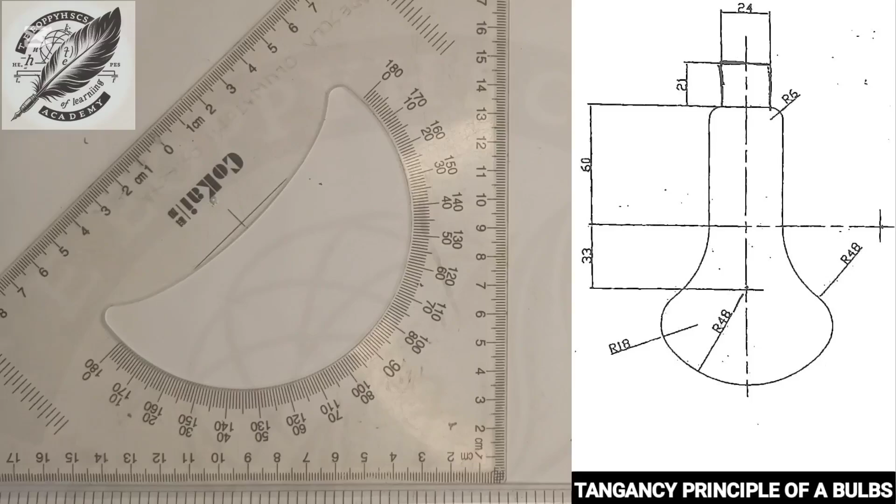Principle of tangency. Today I have a wonderful question, which is tangency on the bulb. So you can see the dimension and diagram showing on my screen.

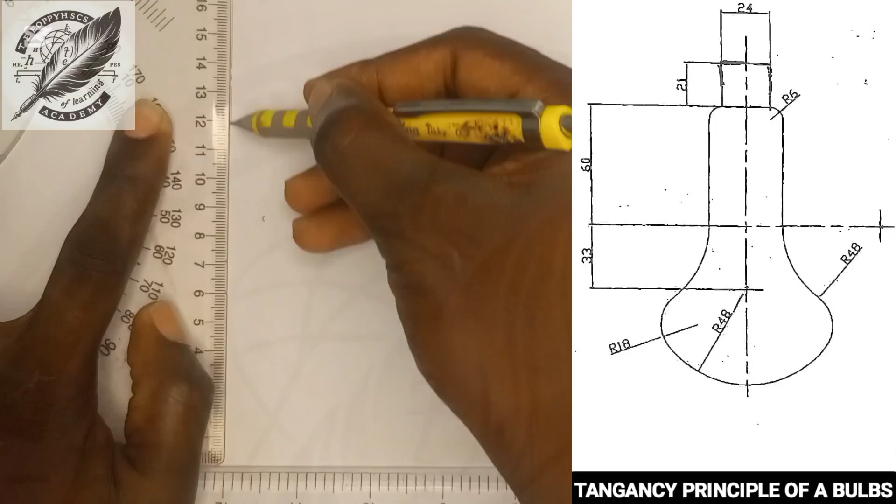First thing you need to do is take your ruler, your T-square, place it on your ruler, and draw a middle line from here. Just draw a center line. So I will start drawing my center line: long dash, long dash, long dash, long dash, long. Can you see it here?

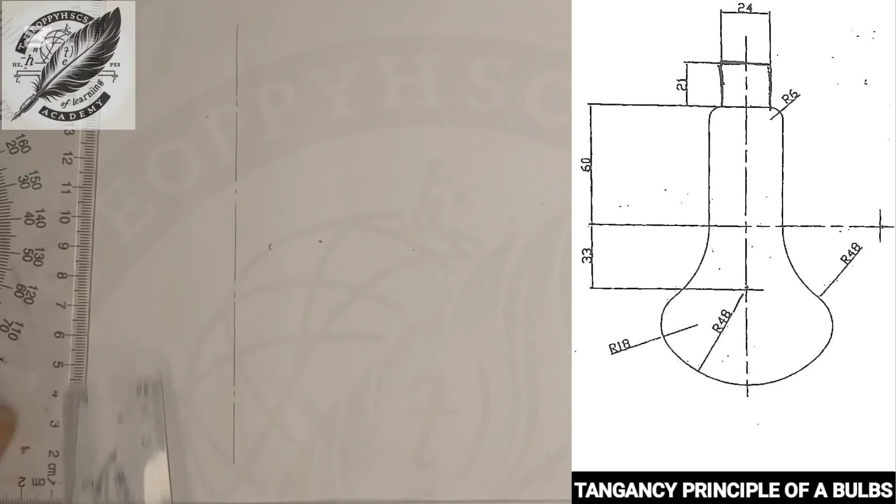The next step is to take a measurement, which they give you. Let me mark a starting point here and an ending point here. You can see they give us from here to here: 60 millimeters. So I'll use 6 centimeters.

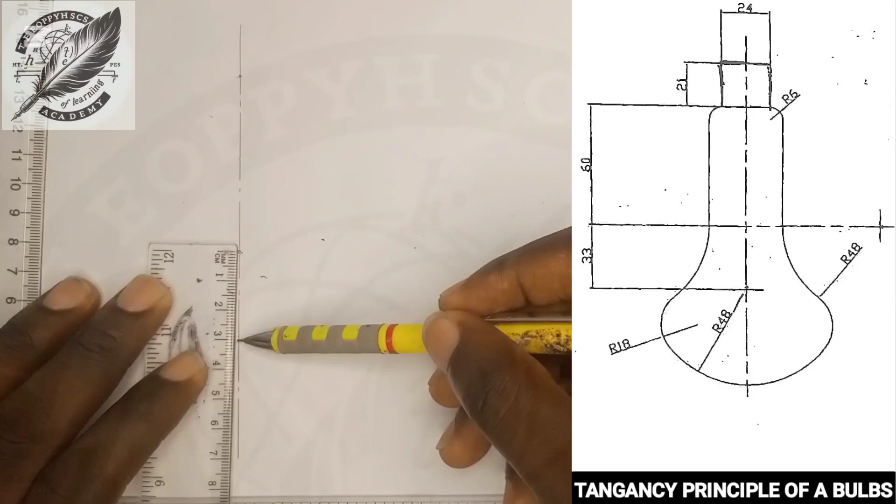I'll mark this space, I'll cut off this space, and I will come to this place. I'll use 33 millimeters, so I'll use 3.3 centimeters. I'll mark this place.

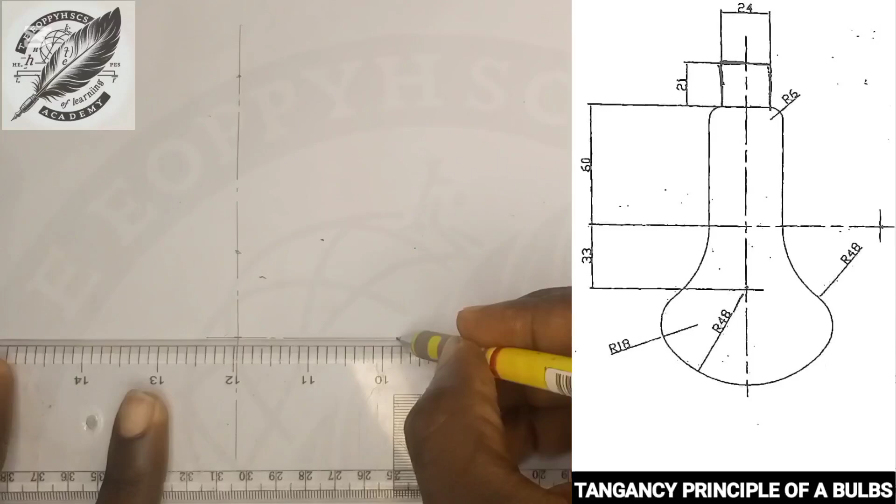After I've marked that, what will I do? I'll take my T-square, place it on top of this point here, shift it here, and draw a center line: long dash, long, and a bit long dash, long dash. This is the first thing you need to do to draw it correctly. This center line means your center of the circle, where you mark your circle, where you start copying your circle.

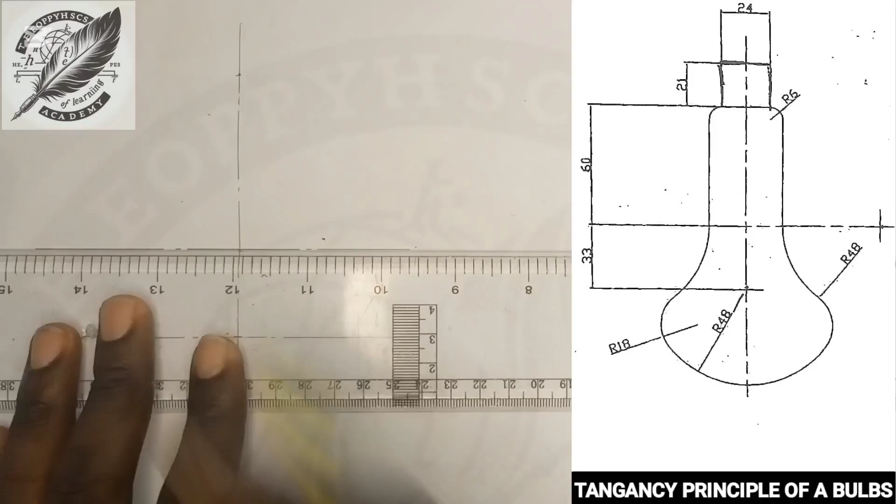Also beautify your drawing: long dash, long dash. You make your drawing different from an ordinary drawing. So these are this. Can you see it now?

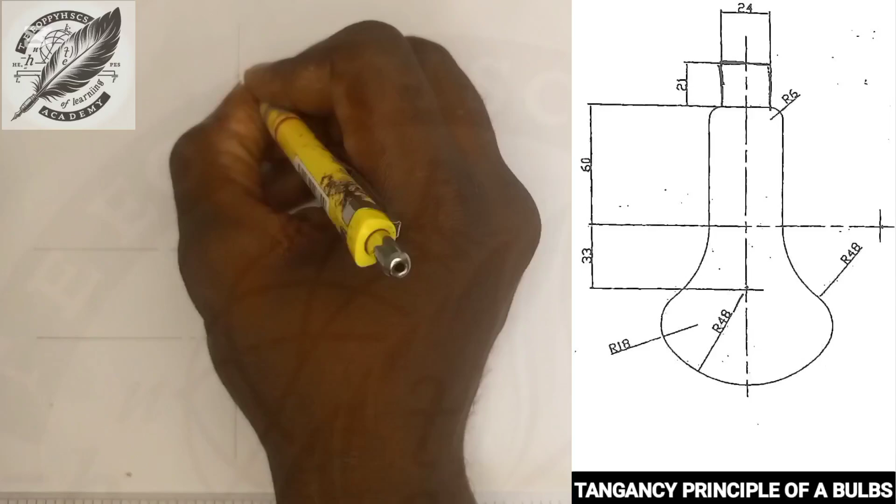So the next thing you need to do: you can see they give us the radius from here. I will label this first center line point A. And from here, this is my B, point B. So this is my C. So the length from A to B is 60.

The length from A to B is 60, and the length from B to C is 33. So you understand that.

Next thing I need to do is the radius from here to here, which is given, is 48 millimeters, which is 48 millimeters, so I'll use 4.8 centimeters. Can you see it here?

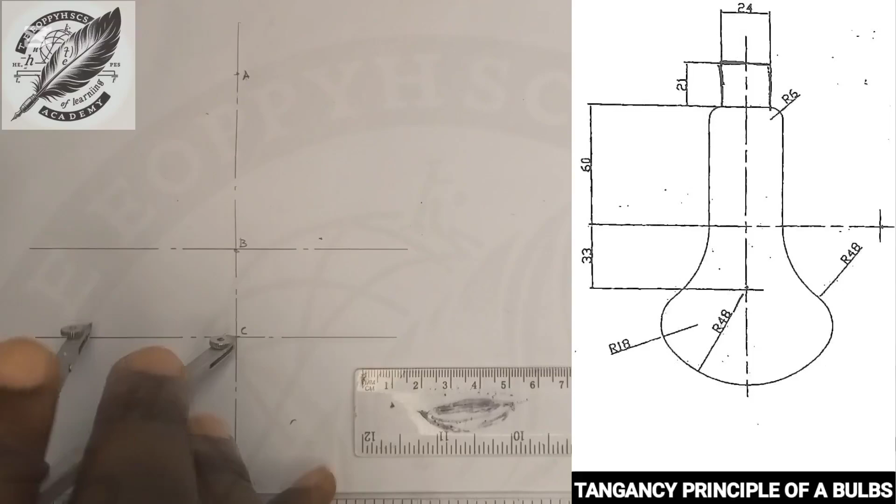Now that I've done that, I'll come to this middle here and draw a circle. I'll just do a construction circle a little bit. Have you seen it? And it's done, now I've done that.

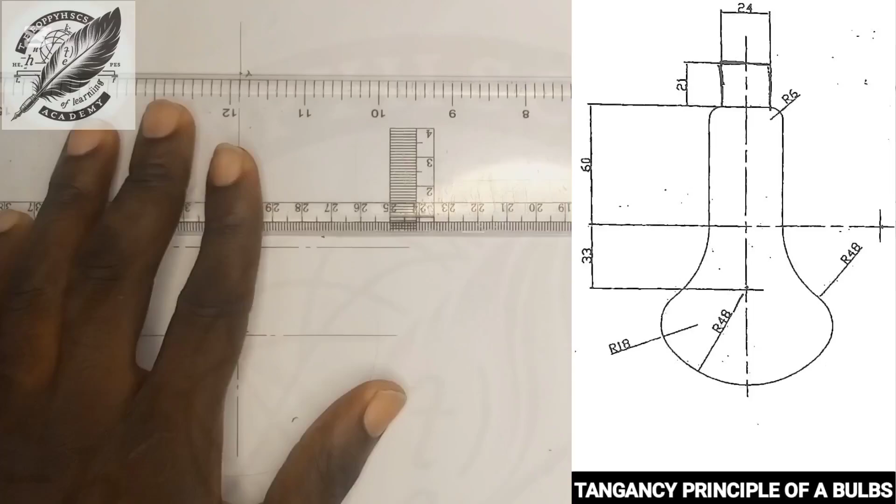Now remember that the length given from here to this place, before I do that, I'll take my T-square, place it on this place, and draw a straight line. Can you see on A? And I'll draw a straight construction line.

When I've done that, I'll carry my T-square, put it down. You can see they give us the total length from this place to here is 24. So 24 divided by 2 is 12, so that is 1.2.

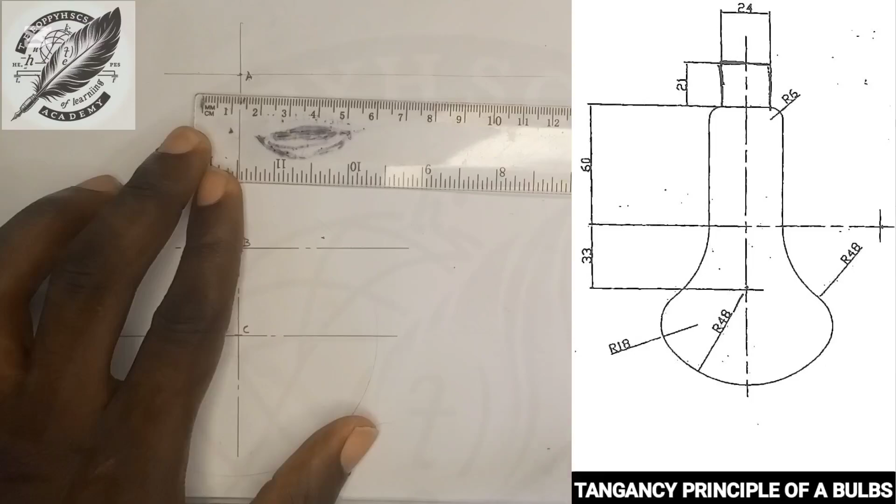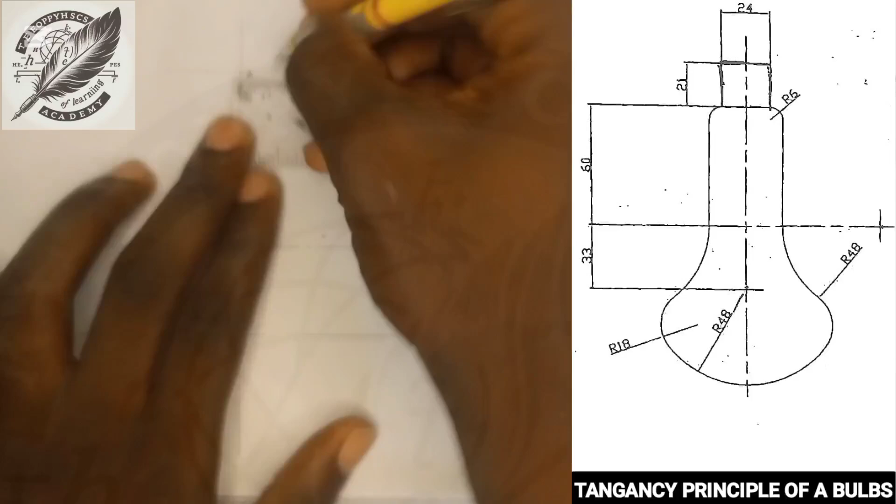1.2 here, so this is my 1.2 here, can you see it? And this is my 1.2 here, so that is 24. So I will label this one D, and this is my E. Then after that, I'll come and connect this, sticking it here. Can you see from D to E?

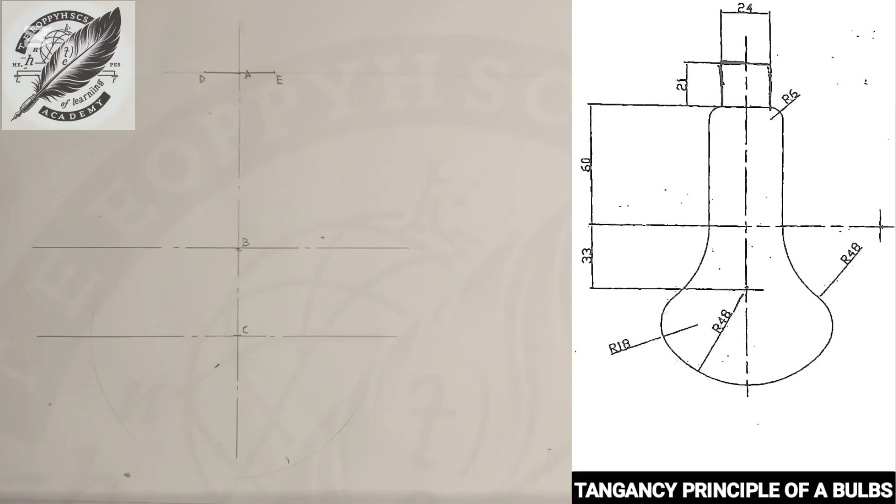So can you see? Now there's a length they give us from here. So the length they give us from here is what? 21. So I'll use 2.1. So this is my 2 and this is my 1. So making 2.1 here. Can you see it here?

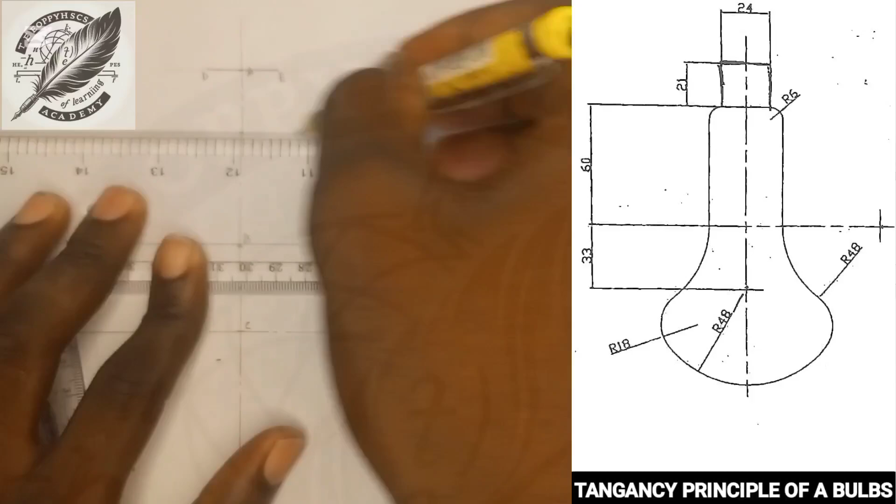So before I do that, I need to project. I'll take my T-square here. I'll draw a fake line, a construction line. Can you see? I place it on this place. I just do a fake line a little bit. So can you see it?

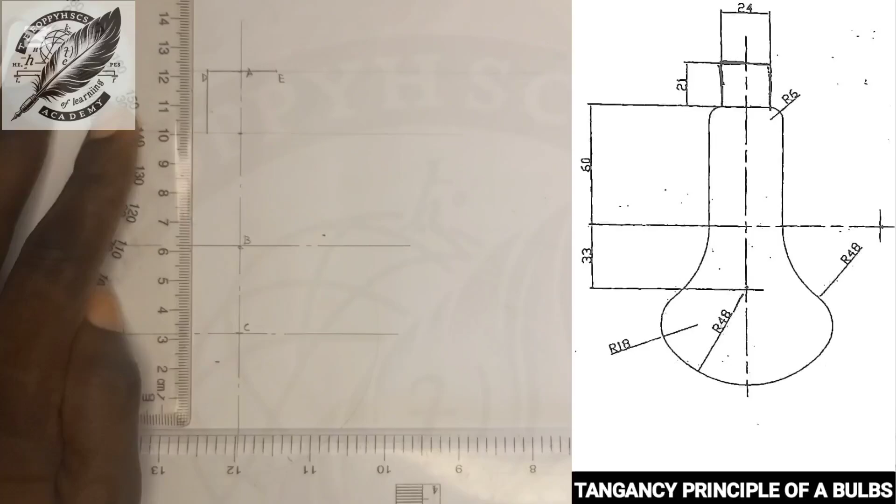So after I've done my fake line, I take my ruler, I put it here. Carry my T-square, place it on my set square here, and I draw this. I can likely thicken it once when I make this piece. So can you see? And I'll come to E here. So this one I'll call it F.

And I'll come here. I'm taking this side. I'll call this one. This will be my G. So you can see that I've gotten that. And I tell you something.

Now there's a radius that is connected to this base. The radius that is connected to this base with radius what? 6. And the same radius applies to this base, radius 6. So for us to get radius 6, this is what we do. This is the principle here.

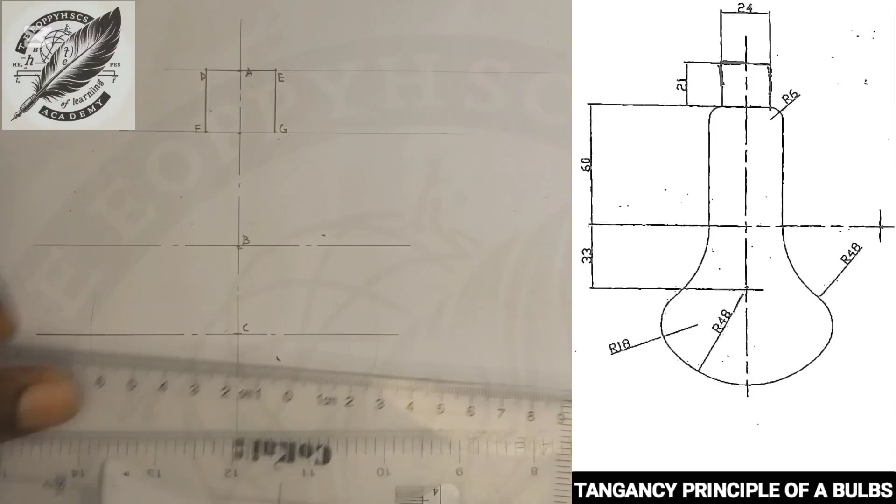So we'll come here. We can just come to this place here and take our compass here. Can you see? And take it to 0.6. Can you see? This is the 0. I'll shift it to 0.6. This is my 0.6 here. So I'll point it. I'll make my arc.

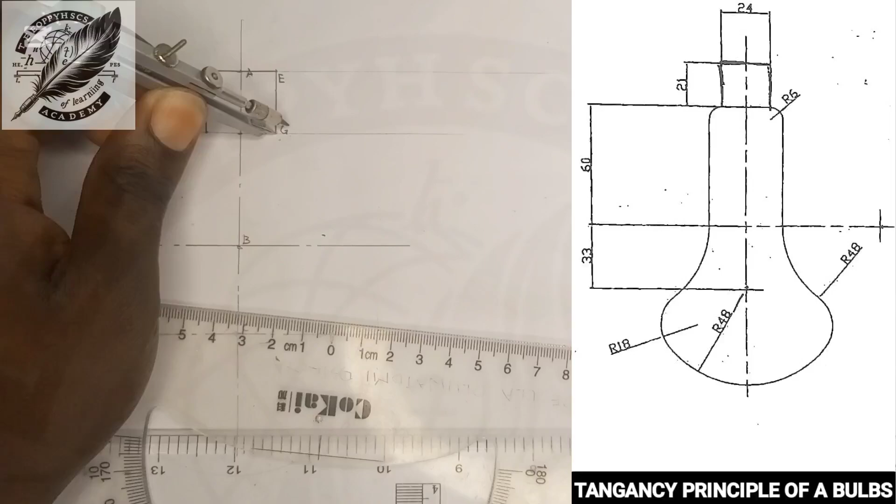I'll start from. I'll put this in here on your G point, G, and I'll make an arc here, and I'll put it on EF. Can you see? Making sure it's on F. I'll make my arc here.

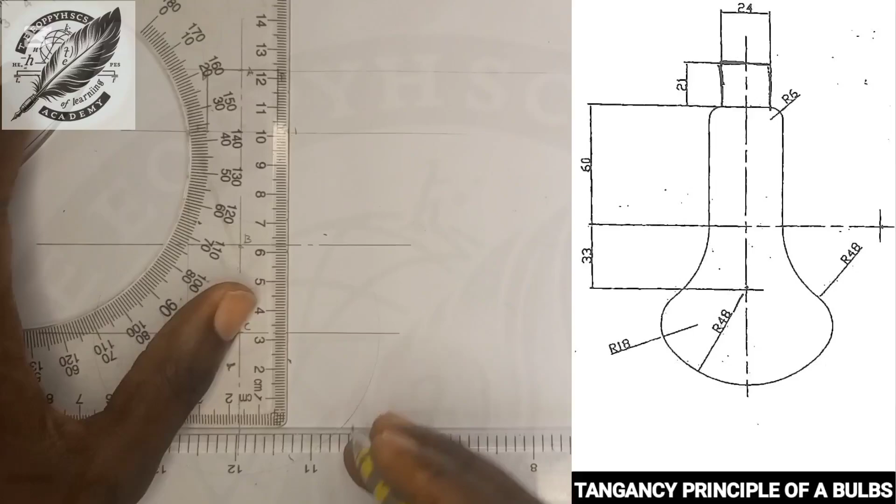So I'll place my T-square, my set square on top of the square, so it'll be straight. And I'll draw a straight line like this, and I'll come here. I'll place it on here, like this. So I'll label this one as my F prime. So this point here as my G prime.

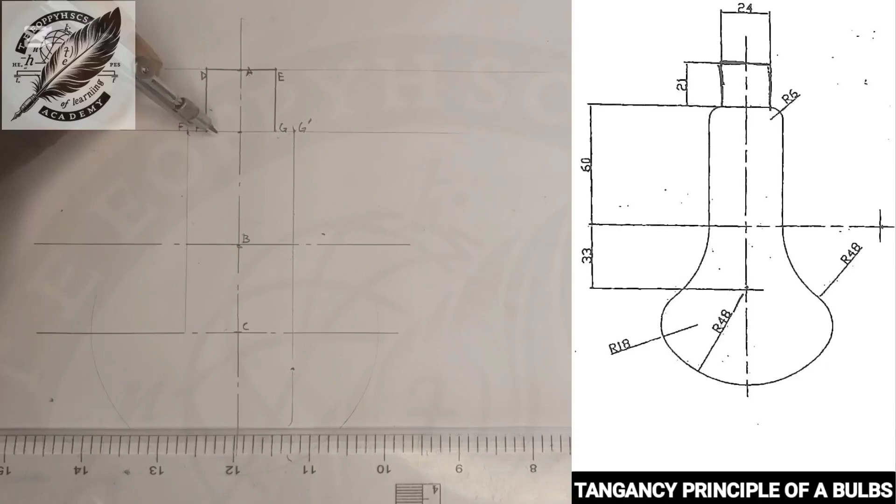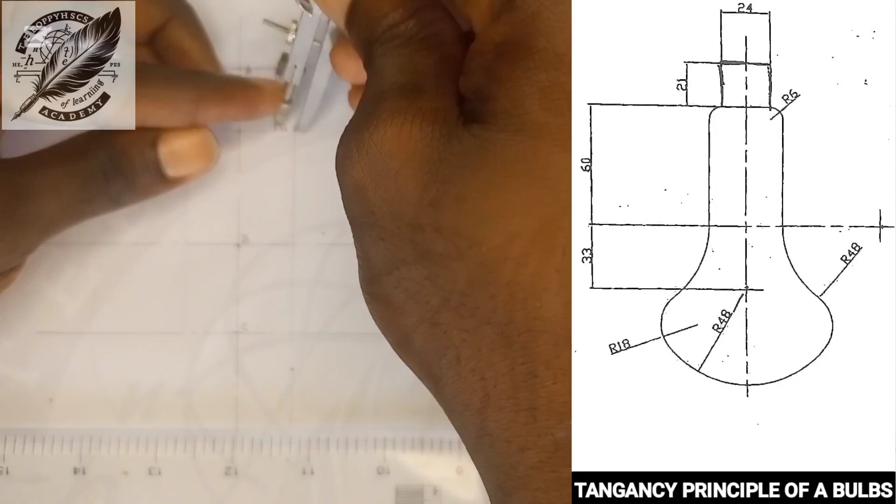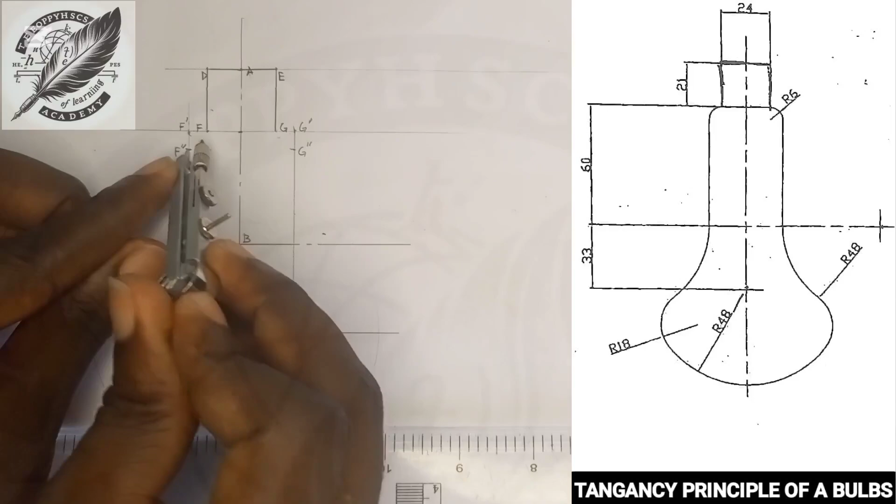So I'll also place it on G prime here, and I'll mark here. So I'll call this place G prime prime. So can you see? So I'll go to EF here. I'll make an arc here, and I'll connect to F prime prime. I'll also make an arc here. Can you see? So with this one, I'll call this one my F prime prime prime.

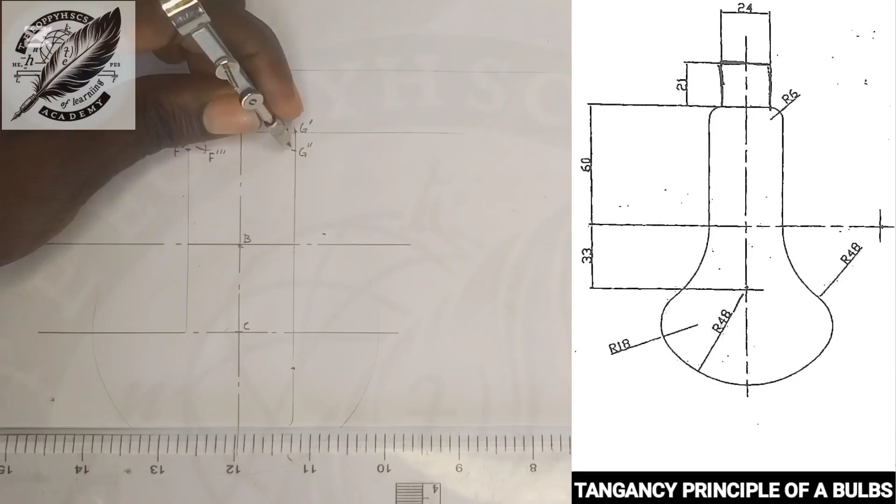So I'll come to G here. I'll make an arc, the same application. Can you see it? I'll make my same application here. I'll mark this, and I'll come here. I'll mark this. So can you see?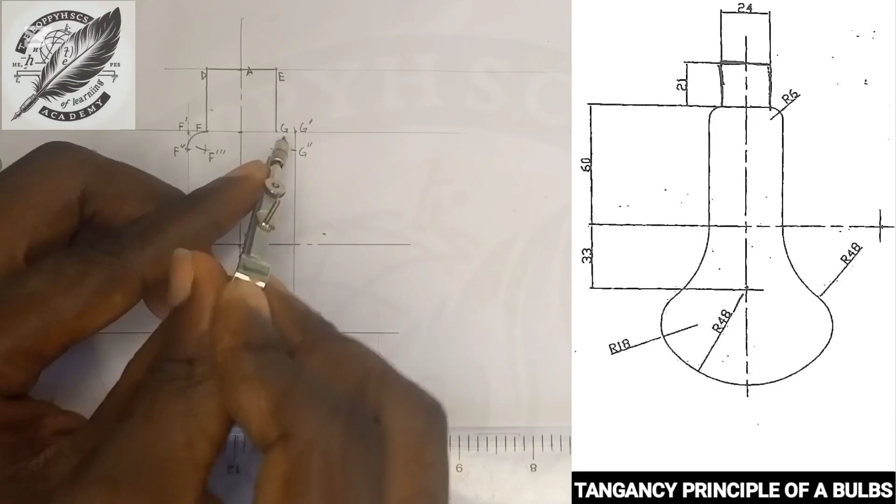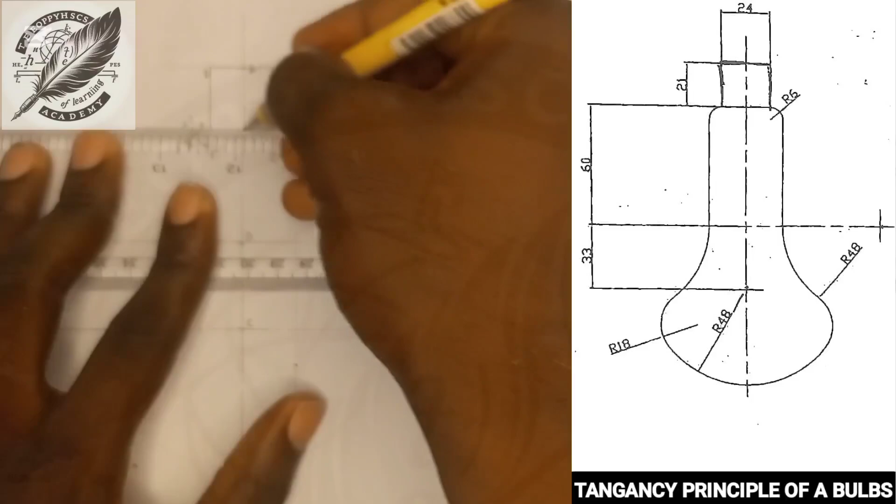So can you see it? So go to G prime prime prime. I'll put this in here. So can you see it here? Now, next thing I can come, take my T-square, top it here, and I'll take in this.

So do you see it here? Now the next part is let me extend this other one. So long dash, long dash.

The next part is that there's a radius that is given here that's connected to this space, and the radius is what? Radius 48. So I'll use 4.8 centimeter here. So it's the same radius. So I'll come here, 4.8. Can you see? So this is my 4.8 already.

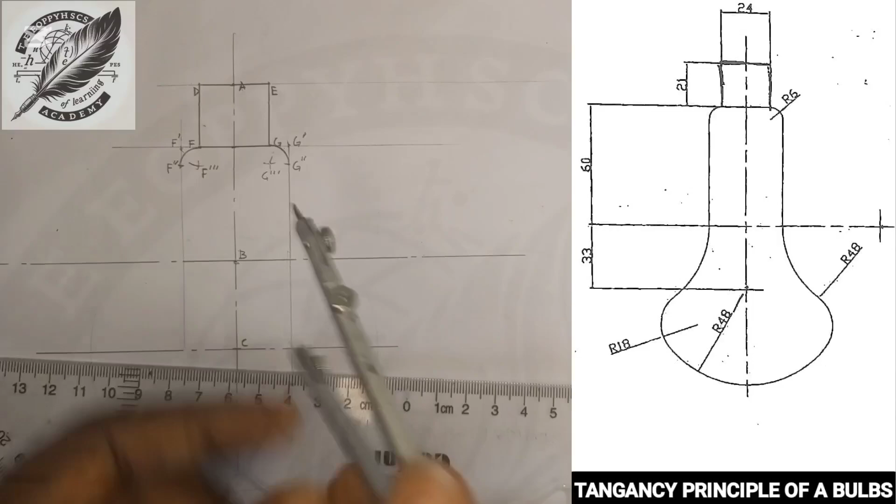So I'll come to this place here. So I'll label this one H here, and I'll make an arc here. I'll label this one I.

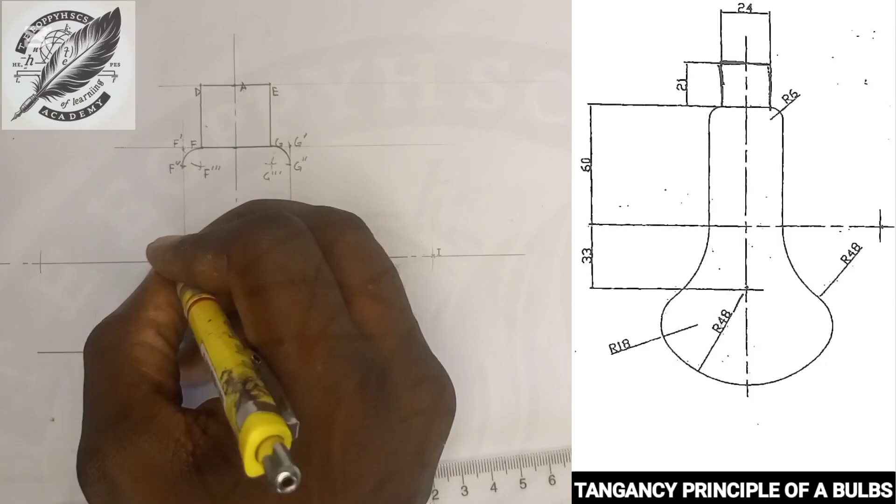So I'll come to this place. I'll place my compass here. I'll label this one J, and this one will be my K. Can you see it here?

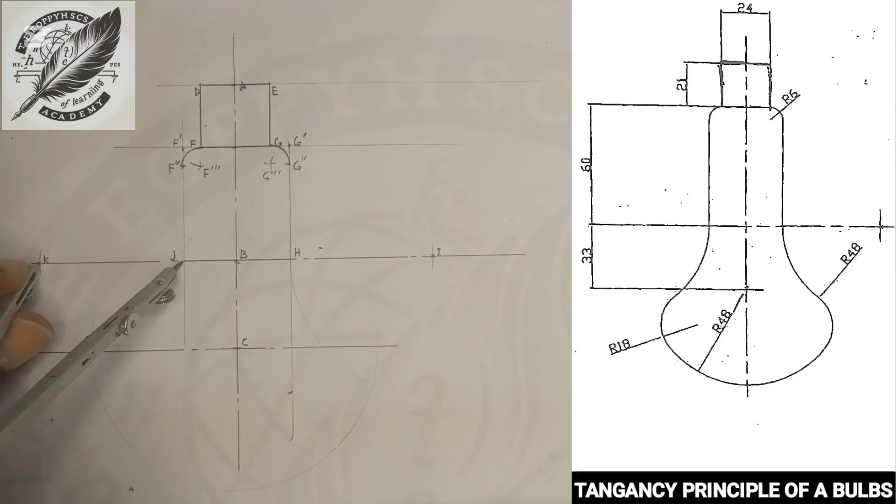So when I'm done, I'll put this thing on my H here and connect this. Can you see? And I'll put my K here and connect it to J. Now can you see it? Now the next thing you need to do is there's a radius that is given in this place.

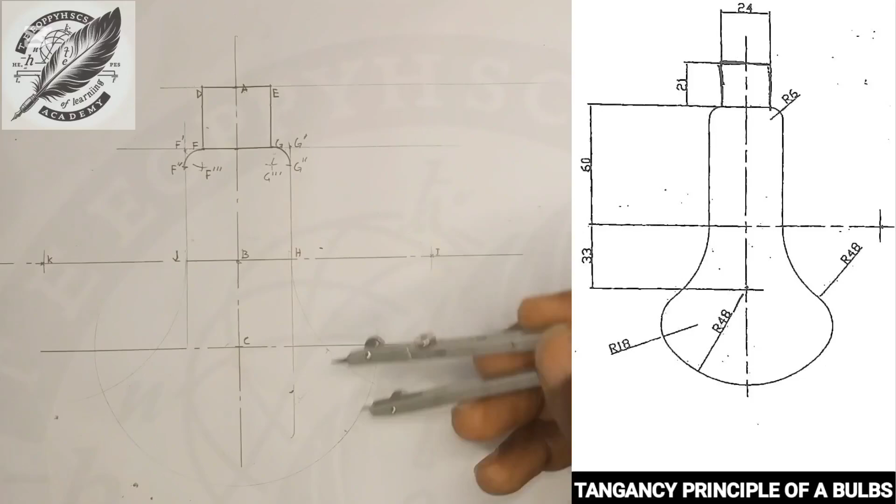What will you do? You just find the way they are meeting here. See, can you see it here? Come here, what's the radius that is given? You want to use what radius? 18.

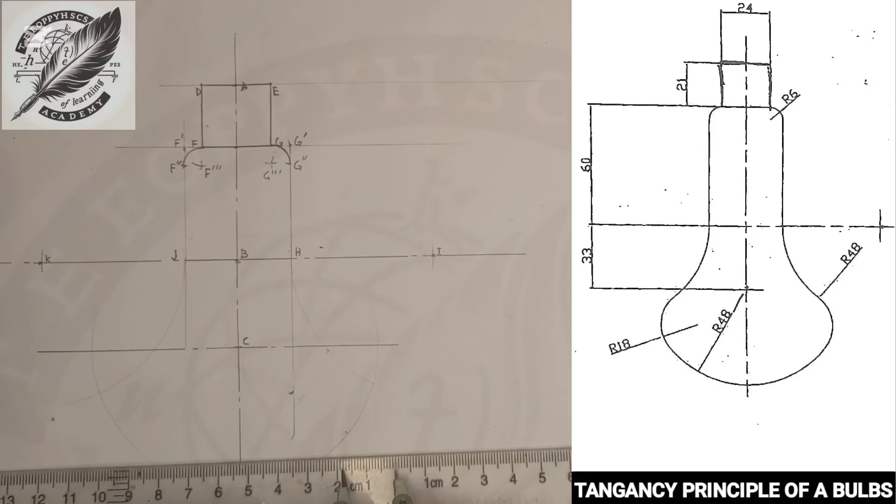1.8 here, and place it on this marking object and make an arc here. Can you see? And also make an arc here. So you come to this space and mark this space, and come here and mark this space. Then you come here and connect it. Can you see it here?

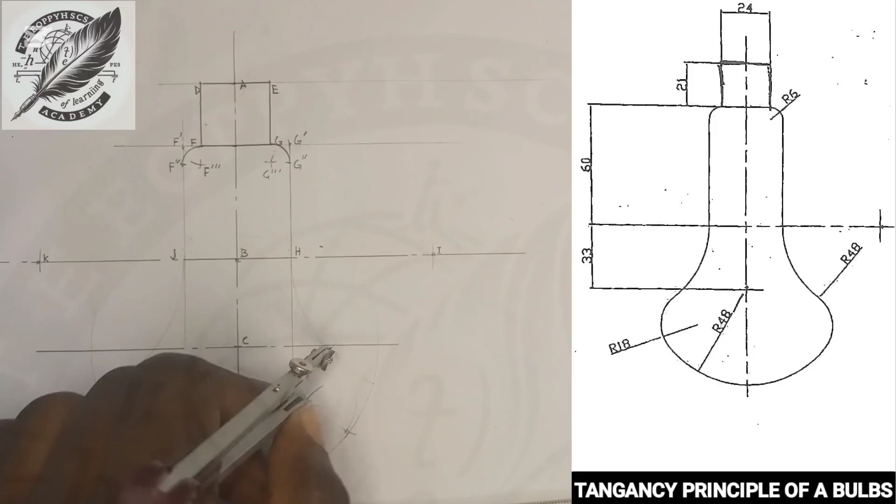So you need to be sure the one is supposed to be connected. So can you see it? But sometimes this kind of principle doesn't work. Let me try it here again. I think I've tried it before, but let me check it. So this is a shortcut here, so sure.

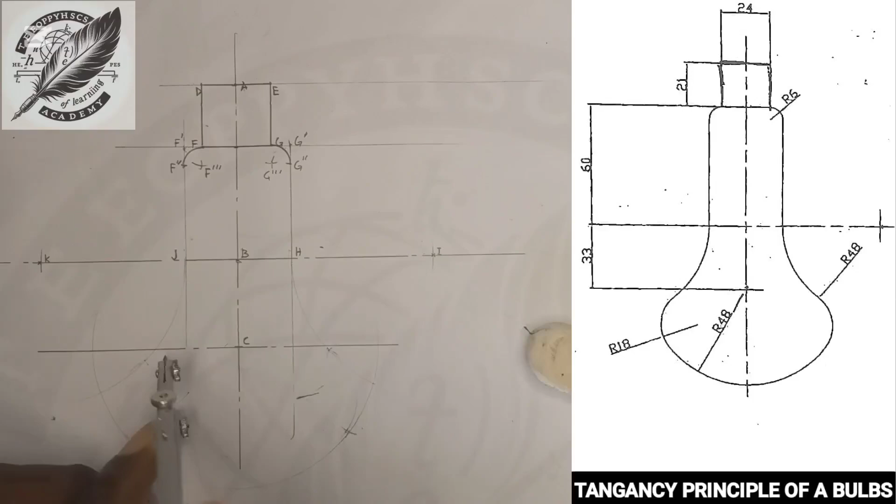I think it works - it can only work for in circle, but for out circle it may not. It depends on the angle here. So what will you do? You see that it doesn't work. So it's not always accurate. This is a manipulation, but it doesn't work.

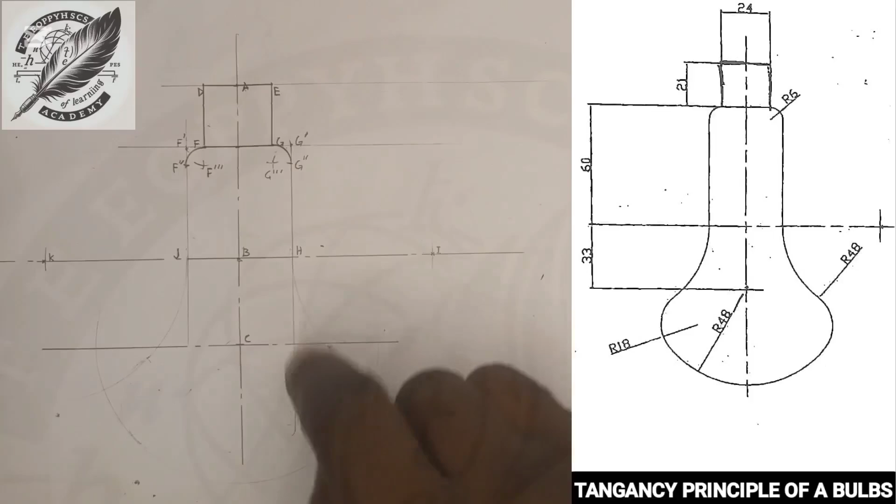So the big part for you to do is what we do. Now we know this is a circle inside here, and these circles are inside each other, and this one is inside it, and this one is inside it. What do we do? We will be minusing. So because we want to get this out circle here, what do we do? This circle is intersecting this circle here.

That will be what, add. Why? You see that this one is here, and there's another circle here, so that they intersect together we add. Why this one is inside this circle? You subtract. Now see that's what.

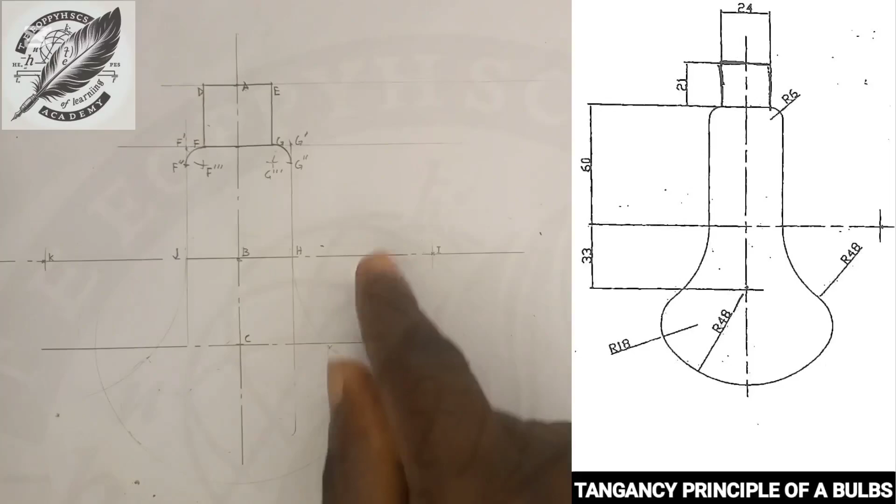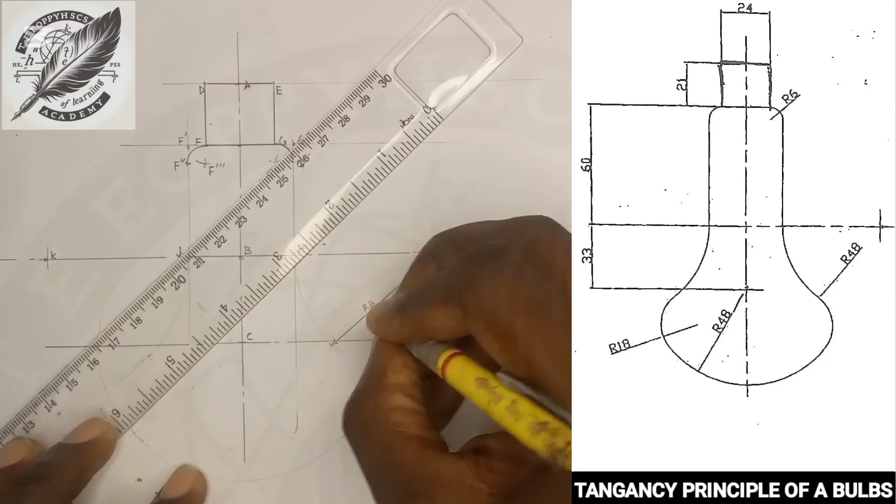What's the reason? So this here, meanwhile, let me just give you an example from here, this place here, this one here already is what? Radius 4.8. And meanwhile, if you don't understand, I just want to make you guys see it again. This one here is just radius 4.8 as well. Repeating this other one too, radius 4.8.

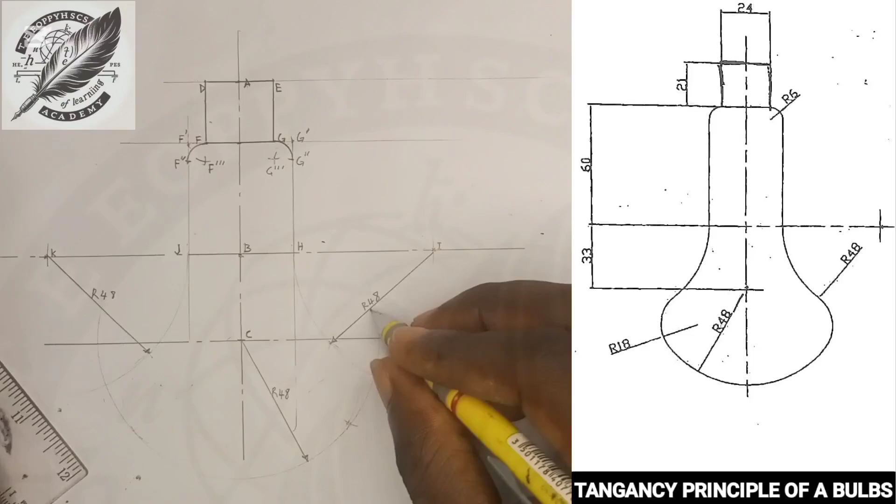Now, because there's a circle that is inside here, the radius here is what? Radius is 18, so I'll use 1.8. So you will now see that to get this one, you now do 48 minus what? 8 point... 48 minus 18, that's 30. 48 plus 18, that is 66.

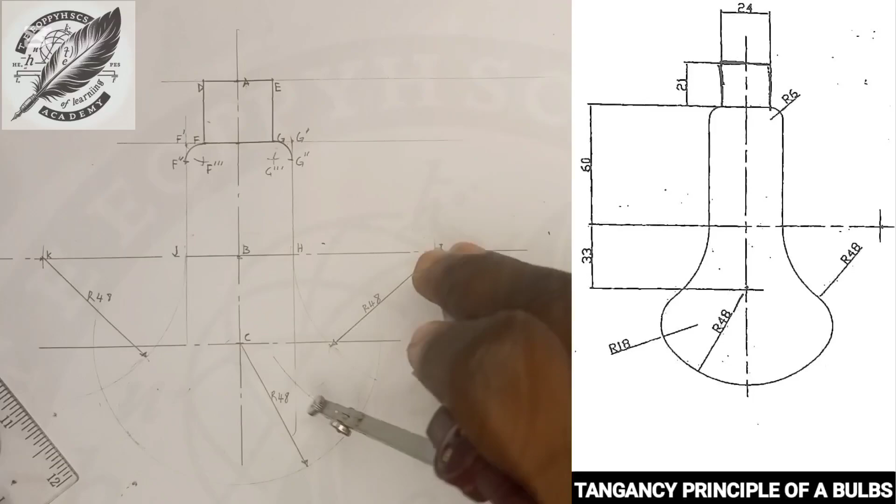I'll use 6.6 here. Can you see? And I'll come to this point here, I'll make an arc. Can you see it here? And I'll come to this point here, I'll make an arc here. So this one here, which I've made the arc.

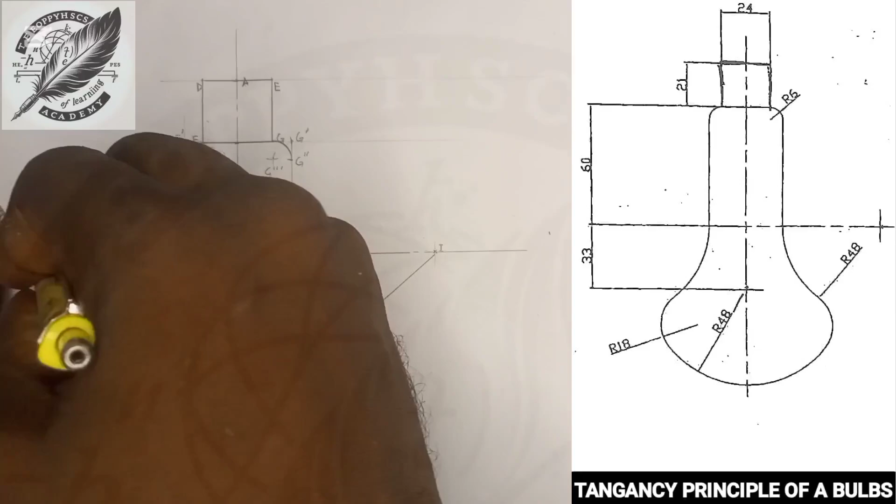So I can just label this so you guys can understand what I'm doing. All this thing I'm doing doesn't mean it's not supposed to be there. So you guys can know that this is 48 plus 18, which gives us 66. So the same thing, the same application here.

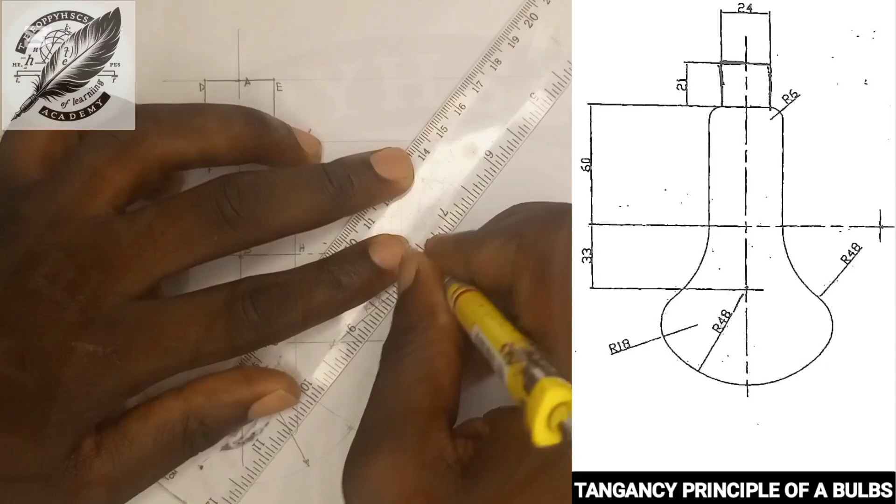So that will be 48 plus 18, which gives us 66. So this will now be 48 minus 18, that is what? 30. So I'll use 3 centimeters here. Can you see it here?

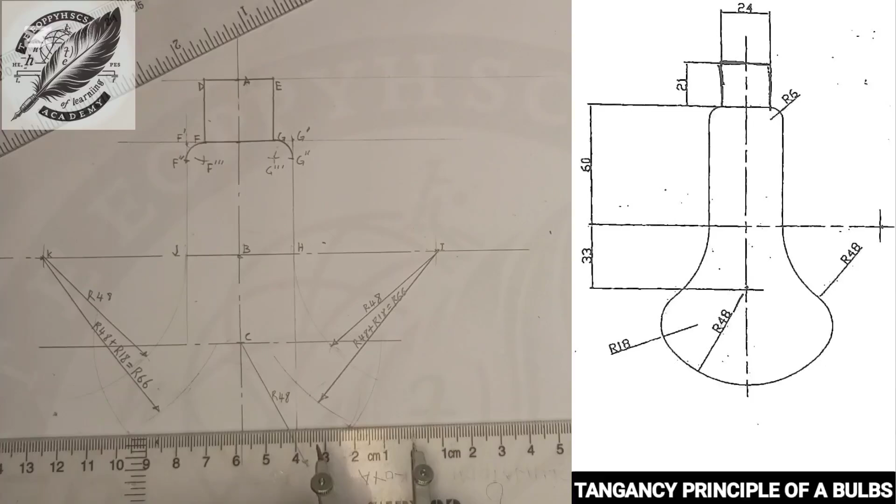And I'll place it on this place here, and I'll mark this. Then I'll mark this. I want to make sure it's on the point, like this. So can you see it?

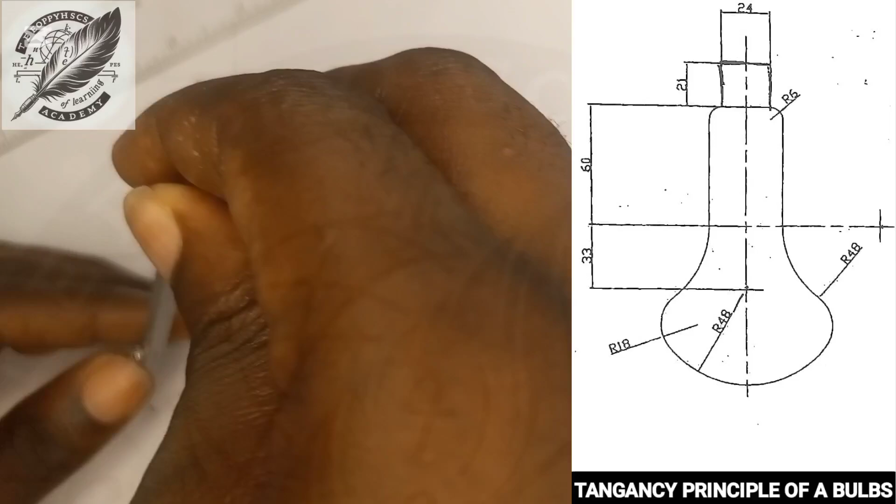So likewise I can just do it like this. This one will be 48 minus 18, which will give us radius 30. You get me? Now I've gotten that one.

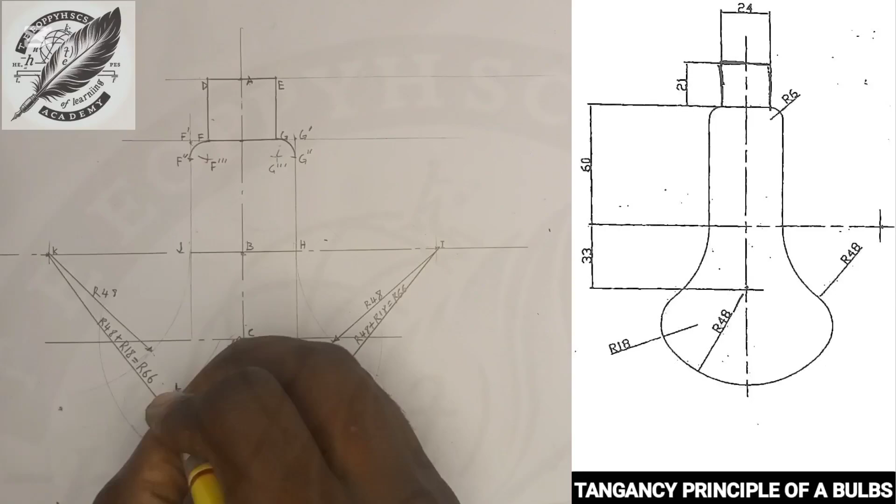Now this one, the next one - this will be L, and this will be my M. So I'll put out towards 18, that is 1.8. So this is my 1.8 here, and I'll place it on this place.

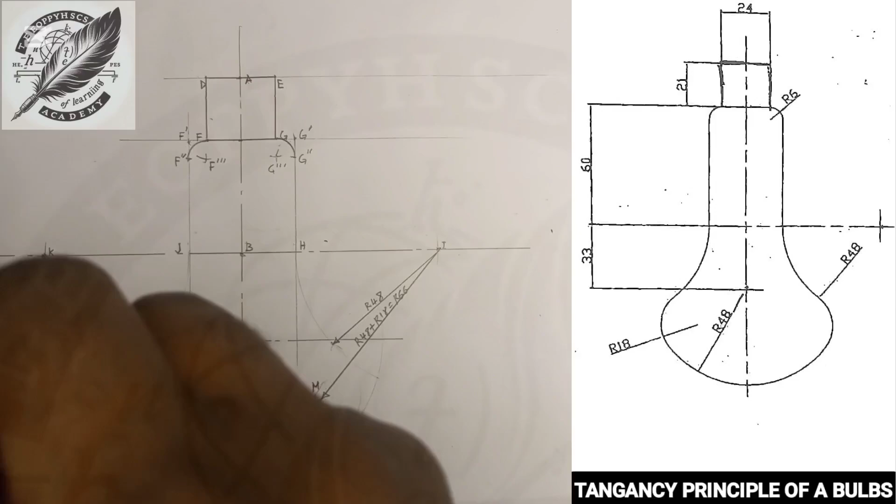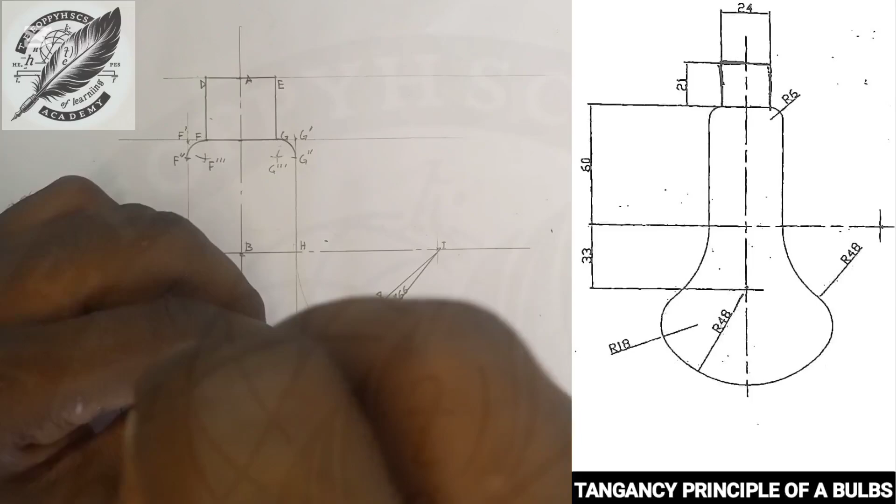See, and I'll come here. So can you see it? So which I will come and label this - should be what? Remember radius what? This is radius 18.

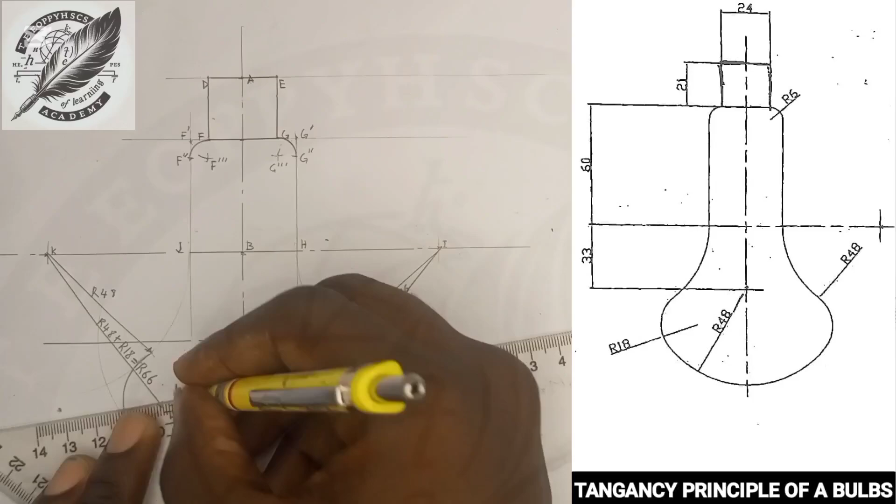So likewise this also is what? Radius 18. So go back to what? Radius 48 here.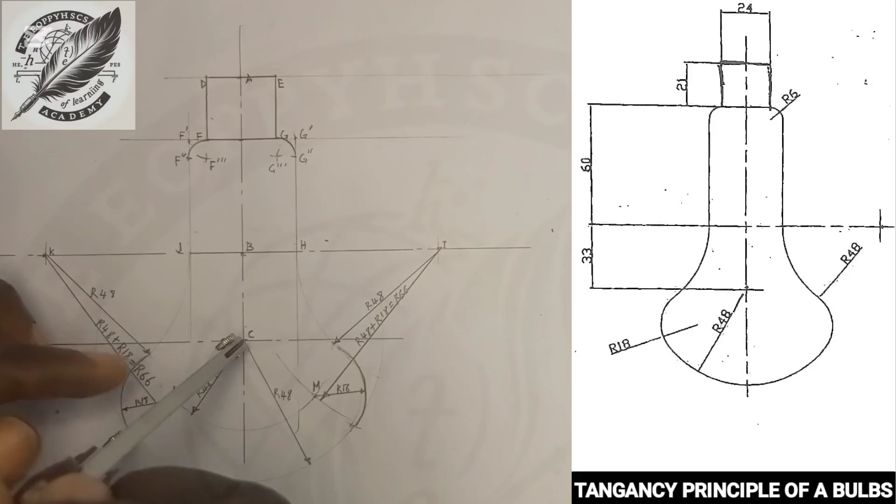So can you see it here? I'll come to I here. So can you see it? I'll come to this space. So can you see? Now the next part is to connect this one.

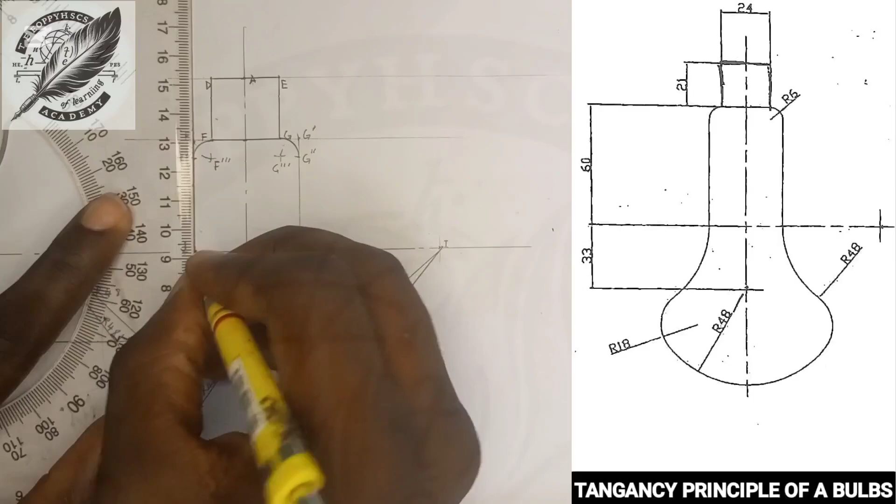Taking this one here, I'm taking this. So can you see this has to go for a bulb?